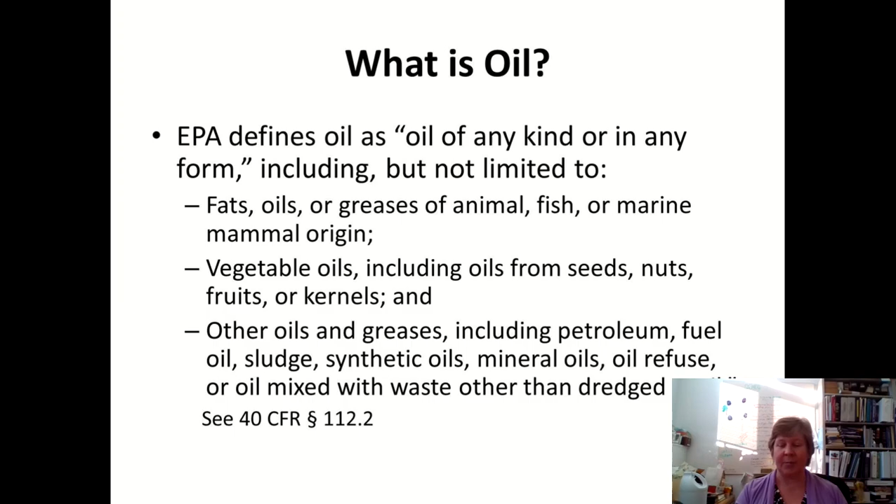You have to have a plan if you store more than 1,320 gallons of oil above ground, or more than 42,000 gallons underground. Here at St. Lawrence, we exceed both of those, for above ground and underground, so that's why we have to have a plan. It's also quite reasonable to expect that because we have it on campus, it could spill and get into the water. And we know that's the case because it happens fairly regularly, despite precautions that we take.

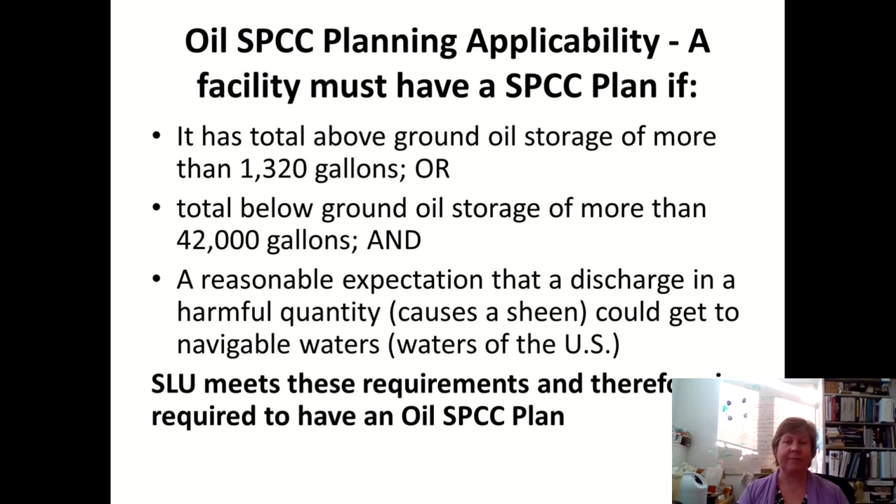So when we go to counting what kind of petroleum we have to include in the plan, it's anything in a container that's more than 55 gallons in capacity. So 55-gallon drums and any size tank, as long as it's more than 55 gallons. I think we do also include the day tank at the heating plant, which I think is maybe just about 50 gallons. It might not be quite that amount, but we include that in our plan as well.

The plan includes information on what kind of oil containers we have, where the containers are located. It goes into detail on our specific oil handling and management practices. We specify who has different roles and responsibilities associated with handling and storing petroleum. It's got a map that shows where our things are kept. It goes into detail on spill prevention techniques and countermeasures we would take in the event we do have a spill. It's a pretty extensive plan.

It's many pages long, and you can find a copy. You can get a copy from each of our facilities managers, from Nick Ormison, or from me. And we also have it online.

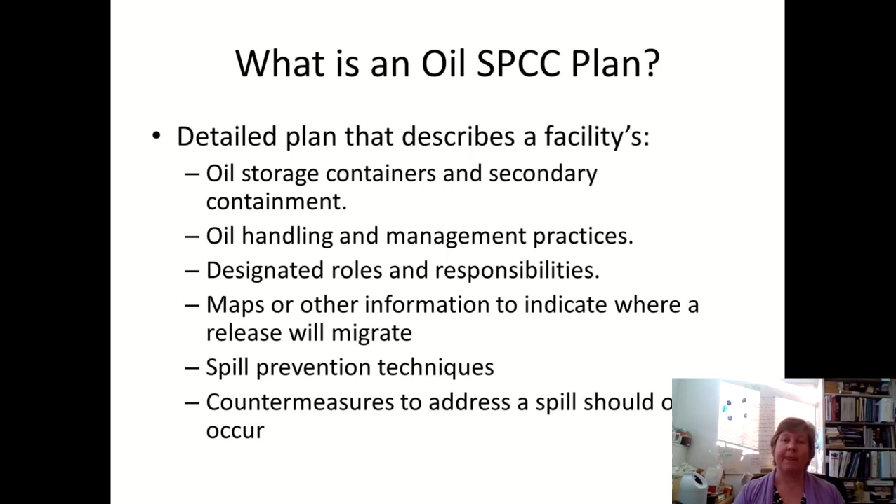The plans have to be certified by a PE. We use a company called HRP Associates, and they send an engineer every 5 years. We have to review our plan and account for any changes that might have been made for what kind of storage we have on our facility, and any changes to how we handle petroleum. If there are any new tanks added, or tanks removed, we need to amend our plan within 6 months of that change.

So the technical amendments have to be done by a PE. We can make our own changes when we have personnel changes. For example, after Dan Seaman retired, Bob Hance became the signatory for our current plan.

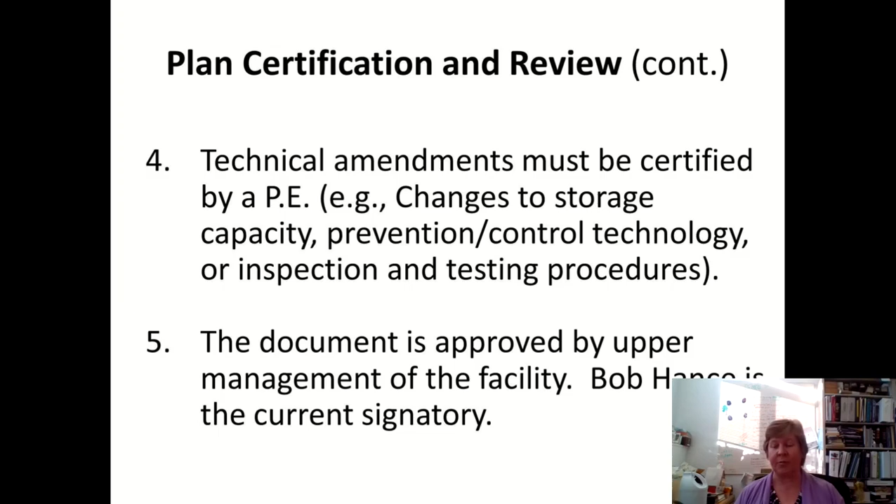So the goal is to really prepare a plan that satisfies the legal requirements of the regulation, one you can refer to in the event of a spill or release, so you don't have to wing it on how you do your response and reporting. I already told you where to get the plan, and safety and security has a copy. So our primary facility contact for the federal EPA or the New York State DEC is Bob Hance.

He oversees developing, implementing, and maintaining the plan and the oil spill prevention program. This is somebody who identifies facility changes where we'd be adding or removing tanks in relation to our written plan, and provides management approval signature, including a statement that we're fiscally responsible for doing the work needed to prevent oil spills.

We also have designation of a primary emergency coordinator, and we have several alternates. After the video, you can go into the training platform and get a one-page list of who our primary coordinators are, with weekday and after-hours contact information and phone numbers. So the primary coordinator routinely inspects storage and handling facilities, writes work orders to make corrections if we find problems.

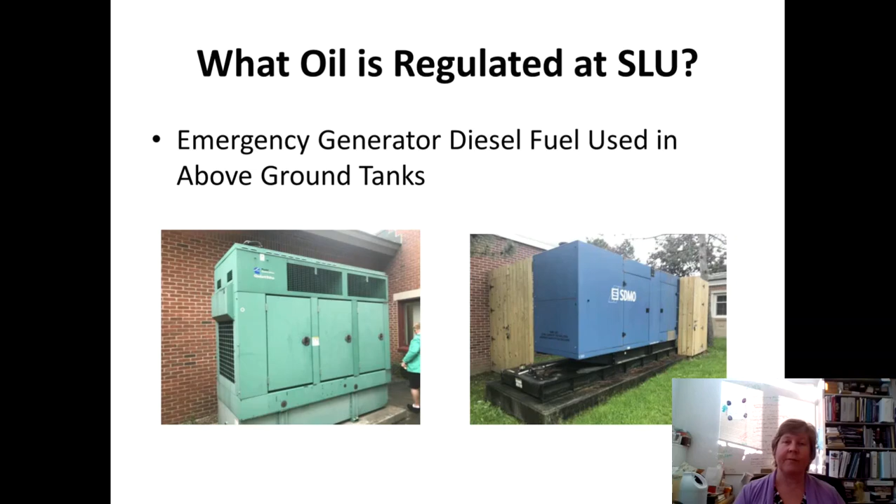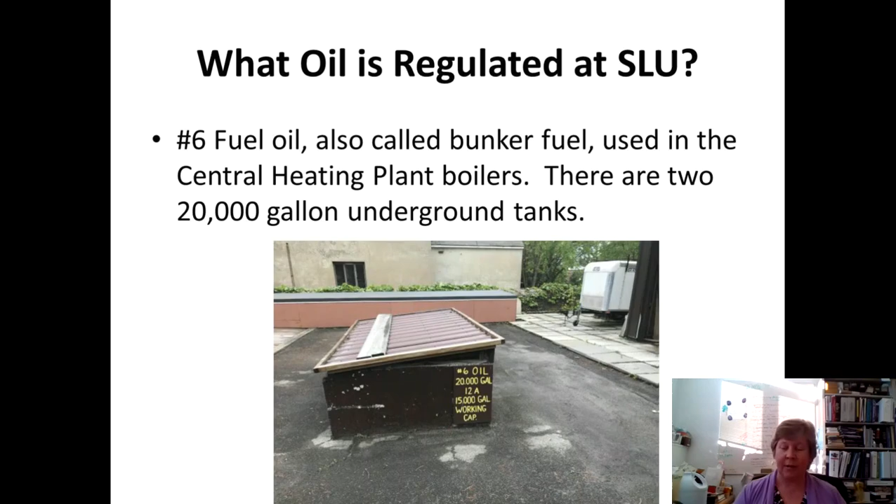It includes our number 6 oil for the central heating plant—there are 2 20,000 gallon underground storage tanks. We also have gasoline and diesel fuel at our fleet shop for fueling up vehicles. Also at the heating plant is some number 2 oil for running the backup generator, located nearby in another one of those Petra hopper tanks.

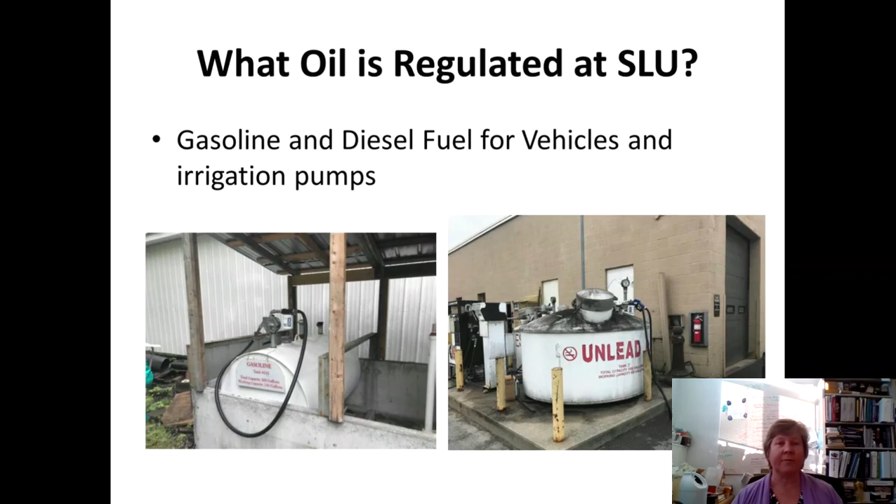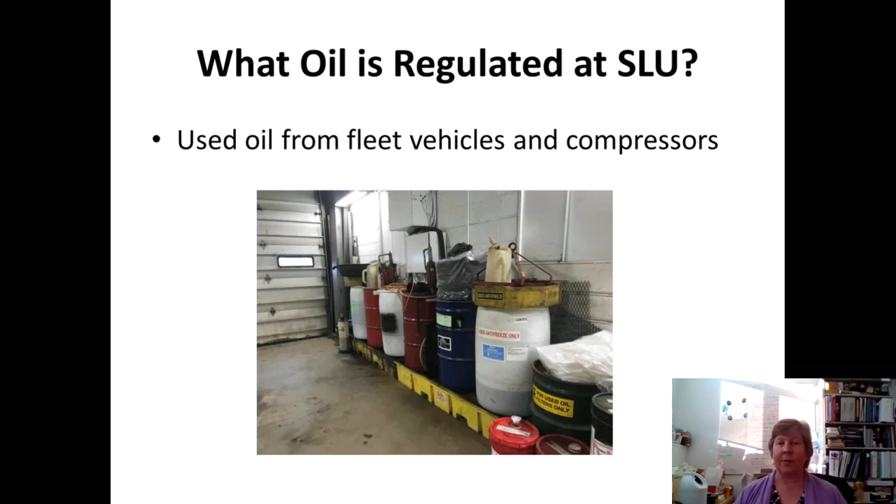We also regulate cooking oil and grease at the dining halls, and drums of used and virgin oil in our fleet shop, and also for compressors at Appleton Arena and at the central heating plant—anything stored in a 55-gallon drum or larger. The plan has a map showing where each of these tanks and drums are located, and it also includes a map of each elevator that has hydraulic oil. Those hydraulic elevator storage units are also included in our plan.

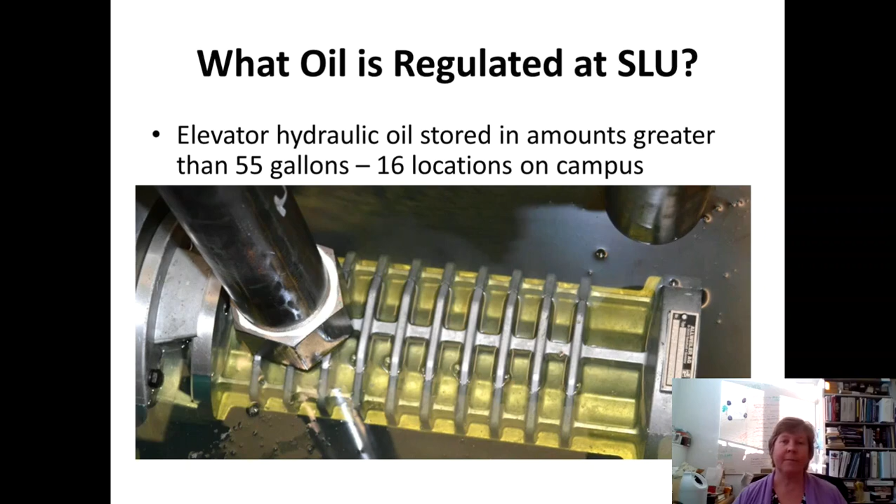So that's what we have to watch out for. Next, we'll go through some of our preventative measures. One measure is using the right kind of tank to store the petroleum safely, so we use double-walled tanks sometimes to prevent release of oil. The 55-gallon drums are stored on spill pallets.

So should you overfill one or it springs a leak in the bottom, the oil will be contained in that pallet. We do monthly documentation and inspect our tanks, drums, piping, and secondary containment. The idea is you take a look once a month and look for rust, holes, fading, discoloration, cracks—all that type of stuff. If you find one of those things, submit a work request and replace the tank or secondary containment, or maybe paint the tank or do whatever is required to keep it in good condition.

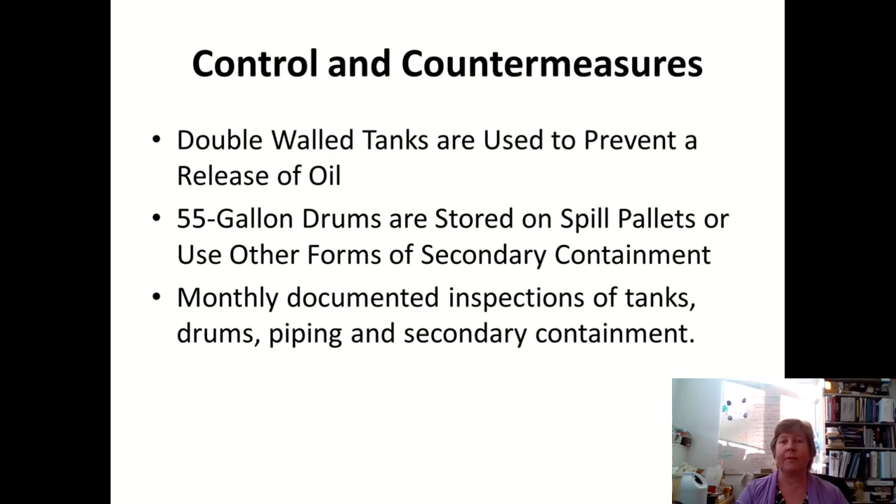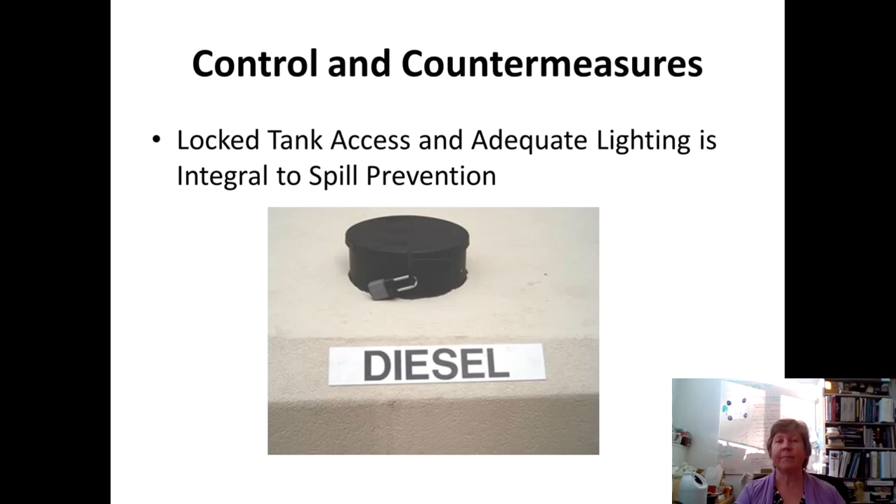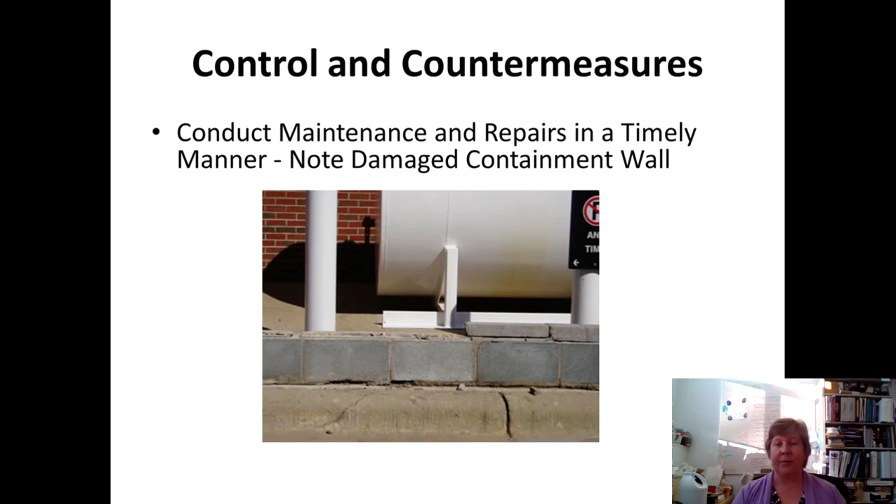Another countermeasure is making sure you're locking access and that there's enough lighting so people can't come in and steal fuel or tamper with your tanks or piping. For example, here's a tank in a secondary containment where the concrete is starting to crack, so fixing that and maintaining your equipment is part of our plan.

Anytime you fuel or unload, there are some measures to be taken. As far as drivers filling tanks, it's a matter of being at the pump, at the nozzle, and paying attention to what you're doing. When we get deliveries from contractors, they're responsible for staying at the vehicle, monitoring the transfer, not smoking, chocking the wheels, making sure the parking brake is engaged, and inspecting the area before they depart after making the delivery. They're also responsible for cleaning up any spills they might have when making the delivery.

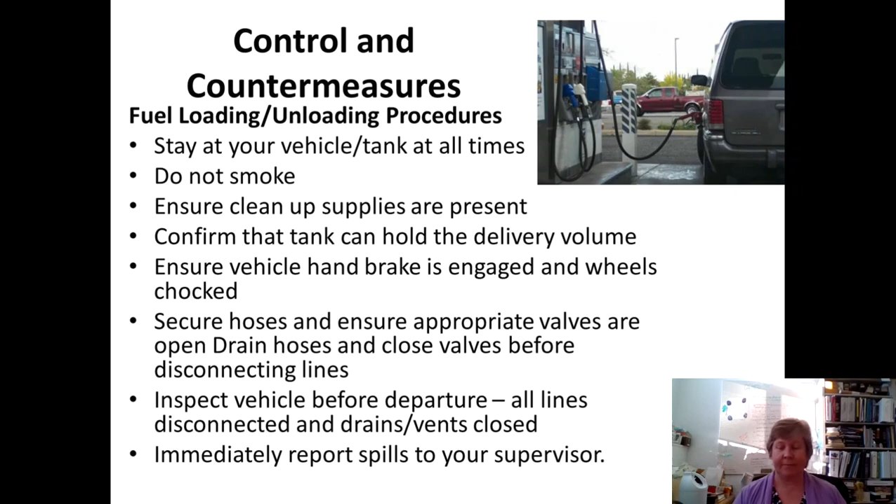For our underground tanks, once every 5 years, we bring in Atlantic Testing Labs, and they do a tightness test on the tanks and the piping. They're single-walled steel tanks that were installed about 1960.

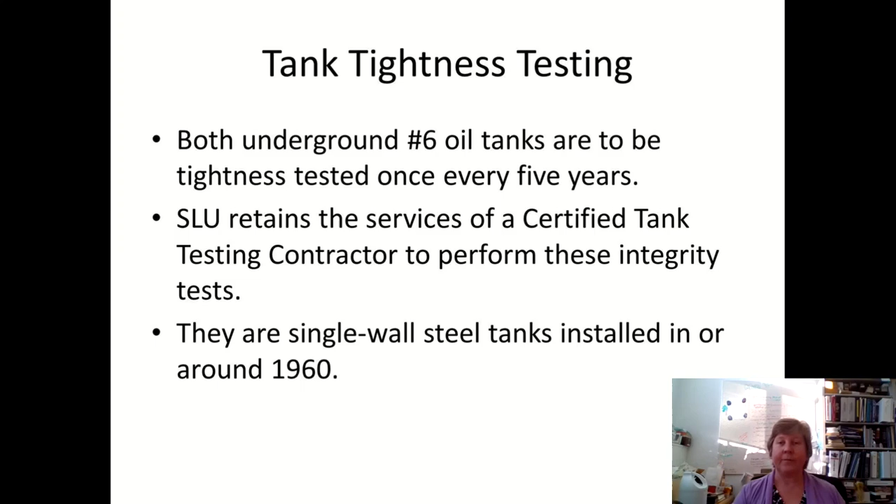The next component is training. We have to do training with every employee that handles transfers and is responsible for storage maintenance of our oil handling equipment. So in our case, it's everyone at the heating plant, our grounds crew. We include safety and security because they might be involved with emergency response. And we also include our dining services facilities people. Training's documented and we keep the stuff on record for at least 3 years.

So what do we do if there's a release or a spill? First thing we have to do is identify what qualifies as a spill. Anytime you have some oil that spills on surface water and you have a visible sheen, or it goes into a storm drain, that is definitely a spill. If you have oil that's leaking from a tank, a drum, or piping, even if it stays in secondary containment, that's a release. If you have a double-walled tank that leaks and the fuel enters the space between the two tanks, that's a spill. Anytime you spill something during a transfer, or if you fail a tightness test with the #6 oil tanks, all of those are spills.

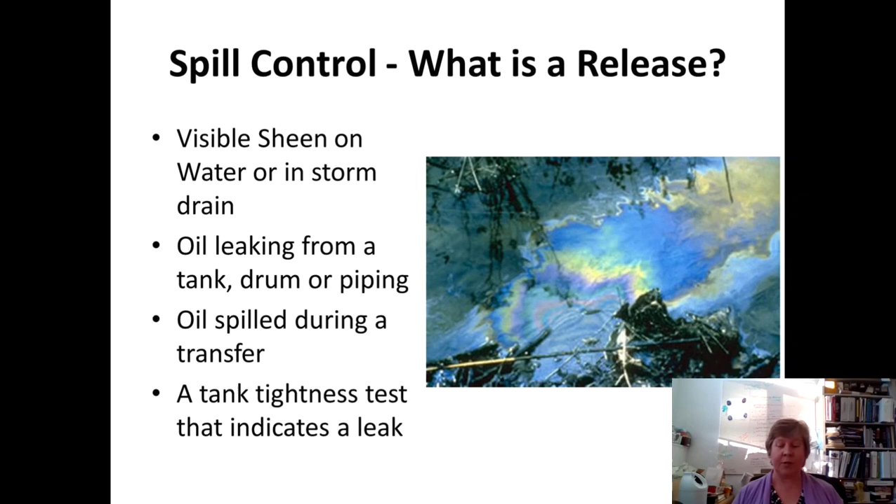So when it comes time to respond to the spills or releases, for what we call incidental spills, you spill maybe a half a cup or a quarter cup next to the dispenser when you're fueling up your vehicle. Those are things that can be handled in-house as long as it hasn't gone further or you don't have any risk of starting a fire.

We're kind of trained as first responders to do a defensive response to the spill. Our grounds folks and most of our heating plant people have gone through a spill response program in more detail. But the idea is to contain the release and keep it from going any further, into a storm drain or spreading onto soil. And it's really important that if there's any chance of danger, you step away and call for outside assistance.

After you've discovered the release and you've done what you can to contain it, you want to call the SPCC coordinator, me, or Marcus, or Nick, or Bob, to let them know this has happened, and Jim, to make sure we're aware of it. Then one of us will determine if the release can be handled in-house or if we have to call out for a contractor.

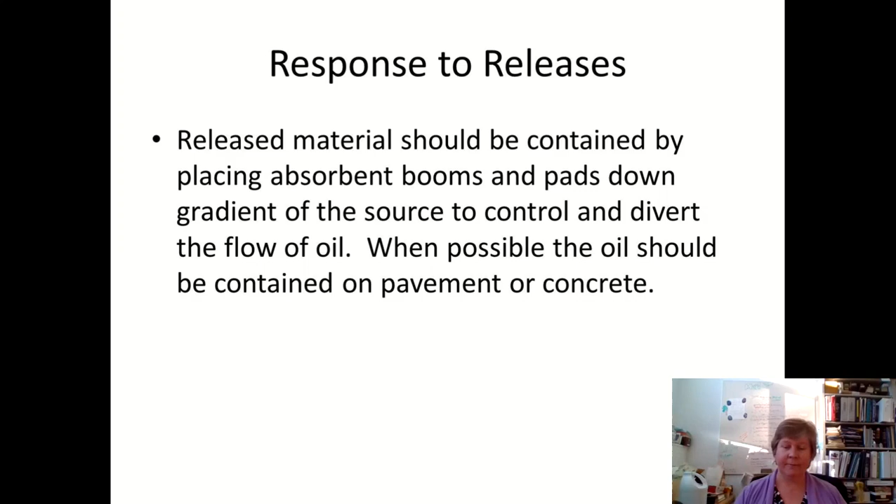And we do have a couple of these storm drain blockers. So I'm going to have you do some homework afterwards, which is to go out and find your drain blockers. There should be some in the heating plant. There should be one at safety and security in the patrol car. And there are a couple of magnetic ones. I think there's one magnetic one over at the fleet shop stuck on the side of either the gas or the diesel tank. So your homework is to go out and find those and make sure they're still there. And if you can't find one, let me know and we will locate it for you.

So you just want to use the magnetic ones. They'll stick to the metal storm grate, and the triangle-shaped ones, they just kind of stick to the ground around it.

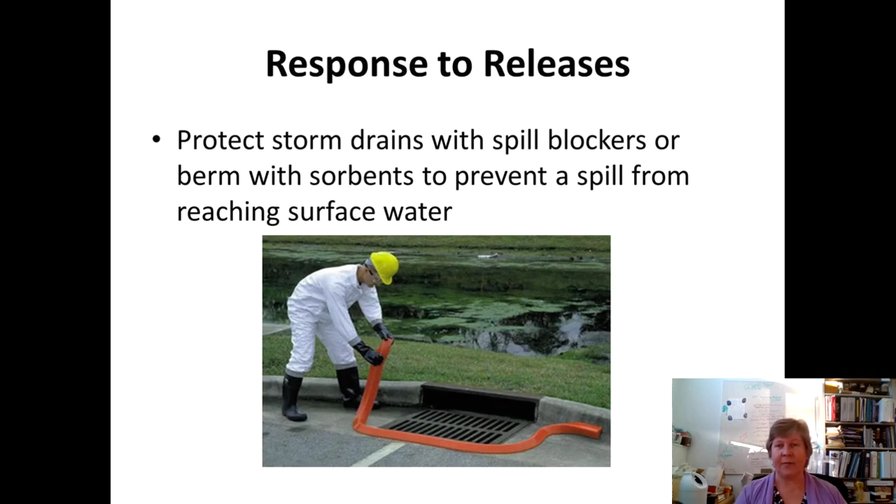Okay, so bigger spills that might have off-campus impact, or that are too big to handle with our small spill kits, or if we have a gasoline spill that's more than, let's say, 20 or 30 gallons, we're going to need some outside help from the fire department and/or our contractor.

So the supervisor of whoever the outside emergency response is, that would be the fire chief, the state police, or the county hazmat team, will act as the incident commander. The smaller spills that can be handled in-house, the incident commander would most likely be safety and security. If we have outside help, we go to the incident command system, and they're in charge. And then we would get in touch with US Ecology, and they would come with their response team, their vac truck, their trained personnel, and their spill responders to help.

Okay, notification is really important for keeping us in good graces with the DEC. So any spill that's on the ground, in the soil, or on the water has to be reported right away to the New York State DEC. Larger spills will eventually need to be reported to the EPA, and we'll go over what criteria requires a call to the EPA.

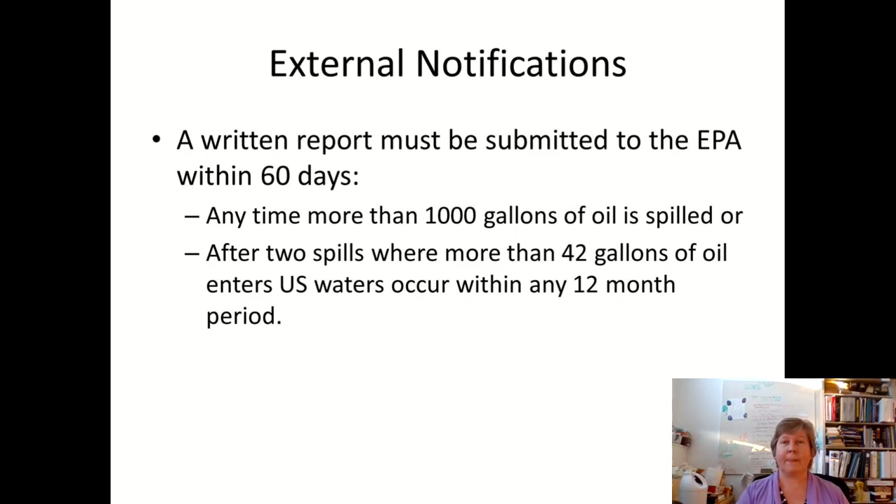If we do have a spill, we have to make sure that it's contained and cleaned up as soon as possible, that we decontaminate the impacted area, typically by removing soil, sucking out water, and occasionally doing steam cleaning, that we properly dispose of the waste materials, and that we do all of the reporting as required to our state and federal regulators.

As far as security goes, places that we store and use oil and chemicals have to be secured so that people can't just wander in and cause havoc.

The rooms and buildings where the materials are stored are going to be locked. Tanks are going to have their fill ports locked if we can't actually put a fence around the tank. Dispensers, fuel dispensers, are going to be key card or key access only. Our safety and security officers do routine rounds, and as part of doing their rounds, they're also going to be checking on these areas where petroleum and oil are stored.

We do have an addendum for construction projects. So when we have a contractor bring on any kind of petroleum in a container 55 gallons or larger, they have to complete their own plan and submit it to us for review and for implementation.

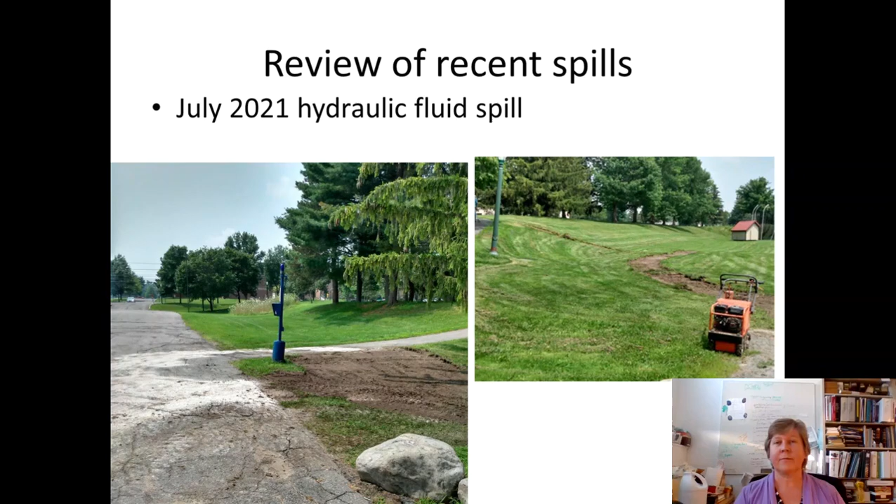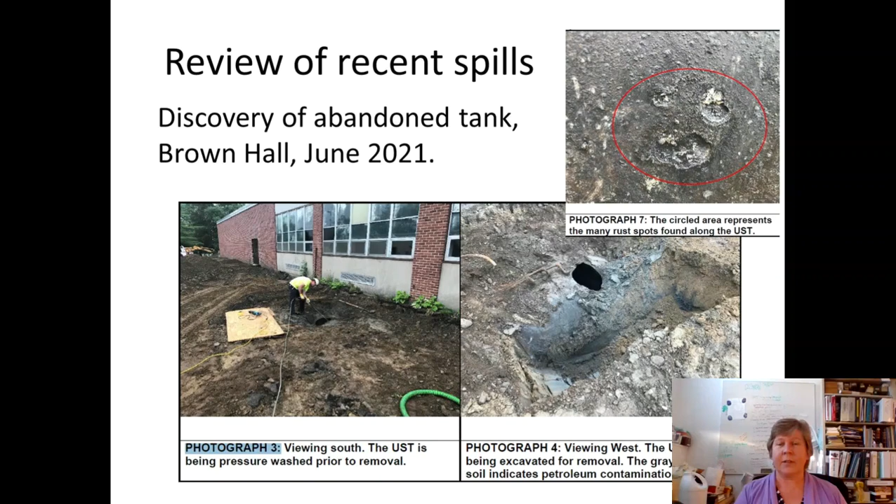There had been some leaks, either from the piping or the tank itself, and the oil leaked underneath the tank and into the ground. There was a pretty big hole there, and we brought in US Ecology to help with identifying the extent of the contamination, doing some soil sampling, and ultimately writing a report. We were able to close the spill after removing all the contaminated soil.

That's the content for today. Make sure that you go in and take a look at that one-page list of emergency response numbers and the list of responsible people. There's a copy of the whole SPCC plan also in the training materials, so feel free to take a look at that, or look at the hard copy kept by the various supervisors, safety and security. If you've got any questions or concerns, or can think of any follow-up that needs to be done at any of our petroleum storage locations, contact me or Nick.